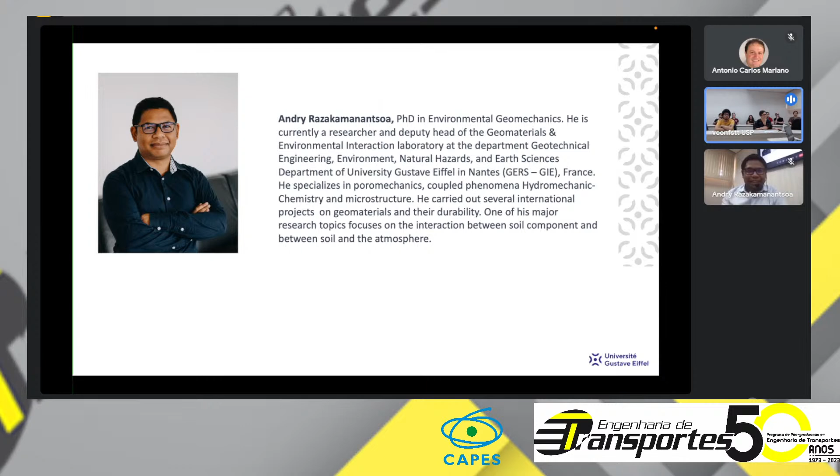Okay, the context is today we are aware about all questions related to global change, SDG goals, and so on. But in earthworks and in road infrastructure in general, the question remains focused on eco-friendly infrastructure from the implementation till the deconstruction, involving all the different steps. Also about the economy of resources, mainly water, because when we talk about global warming, it's a question of water, it's a question of renewable materials. And after, about the durability of a structure, and last but not least, which is very important, the health consideration around the earthwork application and the road in general. I mean, air quality.

When we talk about road infrastructure and so on, when we talk about soil, we talk about stabilization: how to stabilize the soil in order to have the recommended strength to support traffic and all the activities above. I understand during my stay here in Brazil that the way of designing a road in Brazil is a little bit different from the practice that we have in France.

So, considering the soil classification in France, which is not exactly the same as in Brazil, but I think that you know more or less the parameters that I present. In Europe, when we try to select a type of binder used for soil stabilization, we have to consider the climatic condition, which is arid, temperate, or semi-tropical, but most of the time we have a temperate climate, and wet or dry.

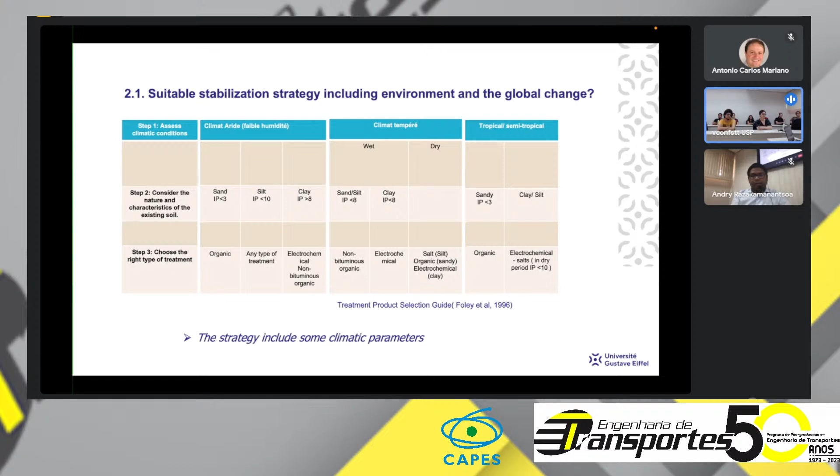So for that we use the plasticity index, and also to verify if you have organic matter or not inside the soil. Based on that, we try to select the product. This is a way of selecting the product which is recognized for soil stabilization, because now we have to consider the environmental aspects, I mean, how harmful the product is to the environment.

So, if you consider the different types of product that are available, I didn't put here lime and cement because they're conventional products, but for the rest, we have to consider these aspects. I mean, the volume of traffic: mainly when we talk about soil stabilization in Europe, we consider that we have low traffic, which is not the case here. We have intense traffic in Brazil, as I understand.

So we consider the materials, their plasticity, and the quantity of fines inside. I mean, we consider the clay activity of the soil, and after we involve the climate and traffic. So this is an example of soil classification involving the traffic.

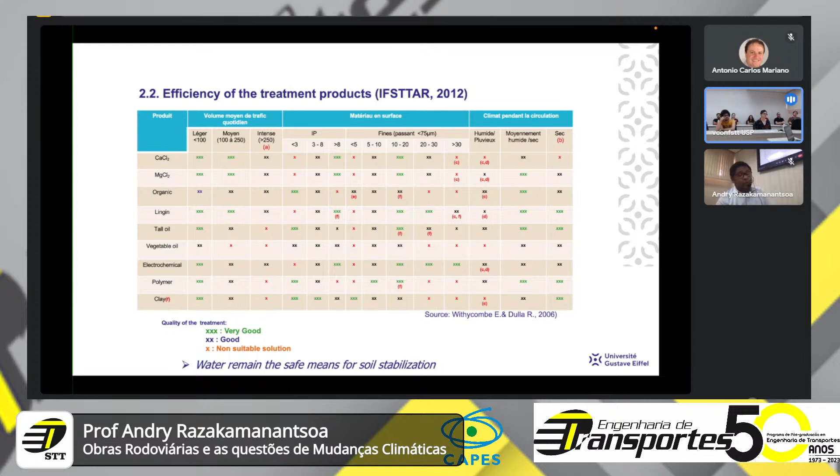But regarding all of those products, the least expensive is water, and we use water in quantity in earthwork construction. So in the following phases, I will talk mainly about the economy of water and its use in earthwork, and how to optimize the use of water in order to optimize also the strength, the implementation, and the trafficability on the road.

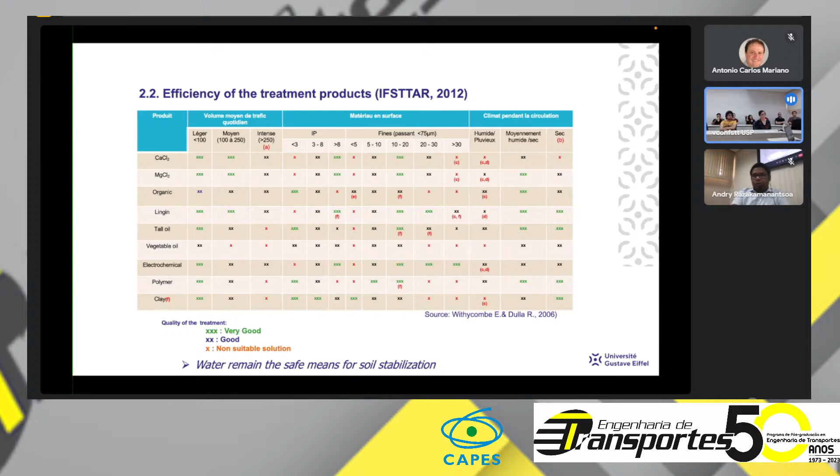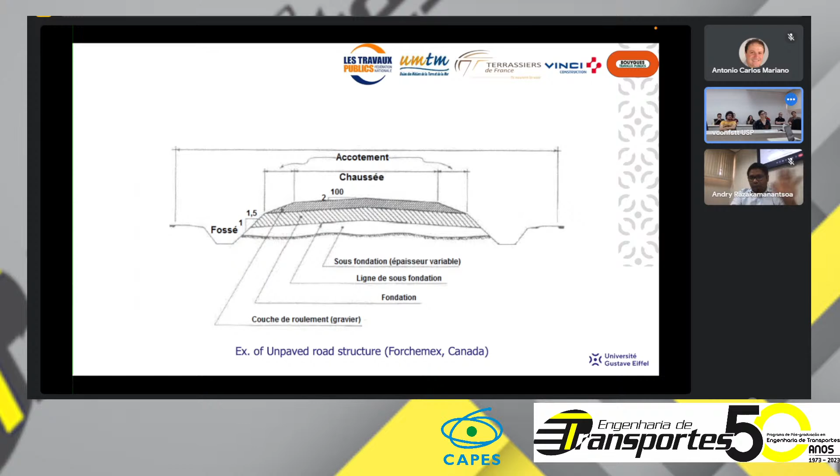Let's talk about the implementation. When you talk about implementation of a road or unpaved road, this is an example of a structure of an unpaved road. I go ahead. One parameter which is important is the compaction level. I don't know if you have a sheep foot roller in Brazil. I think no. This one. I think it's the same use as in Europe. We use a sheep foot compactor when we have a fine soil, a clayey soil, or a lateritic soil with a high quantity of fines.

And as you see, we are not able to reproduce this mechanism of compaction in the laboratory. Today, when we design roads, earthworks or earth structures, we base it on the mechanism of compaction which is well known, Proctor, and you do the calculation based on that. So today we consider that many things have been done in this way, but many disorders remain unexplained until now. For example, rutting: you are not able to understand it from a laboratory point of view, but we see it in reality, in real life.

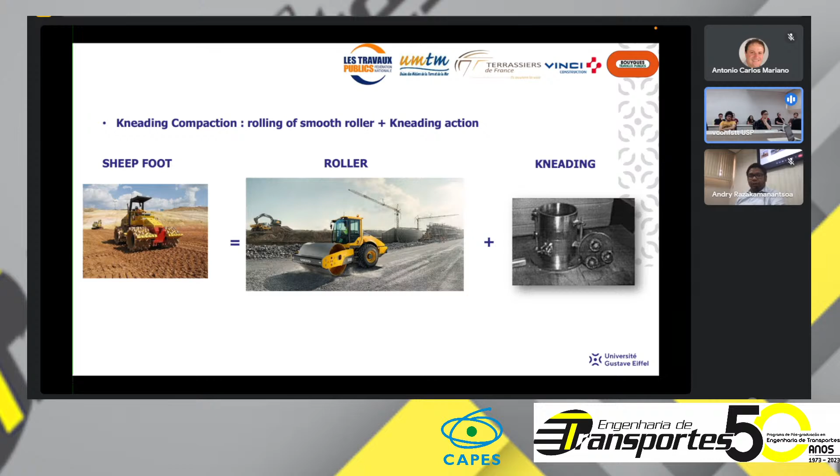So by considering climate change, resource saving and water saving, we tried to think and work to understand the mechanisms governed by the kneading in compaction. So when you consider the sheep foot compactor, what is this? It's a combination of roller compaction with kneading compaction, which are two complementary processes. Let's talk step by step about roller and kneading compaction.

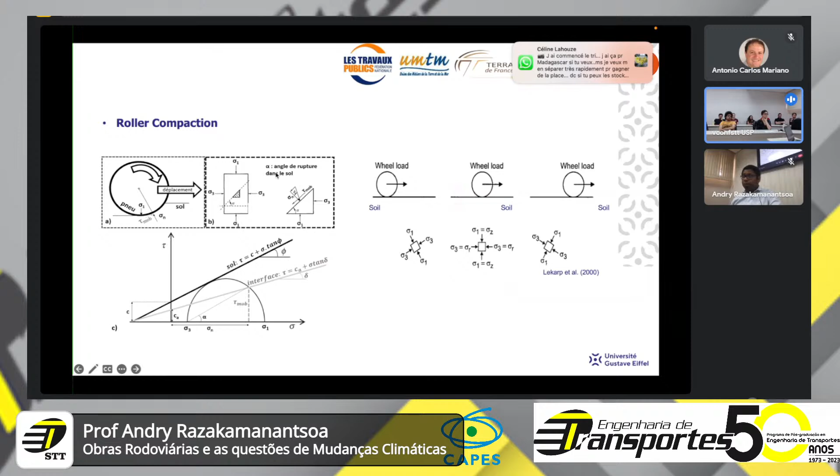When we talk about roller compaction, I won't go in deep, but just globally: during the rolling of a wheel, we have stress tensor rotation, and during the rotation of a wheel we have an additional stress tensor which enhances the soil compaction. This is the case of roller compaction. I won't talk about Terzaghi and so on. We can discuss it later if you need.

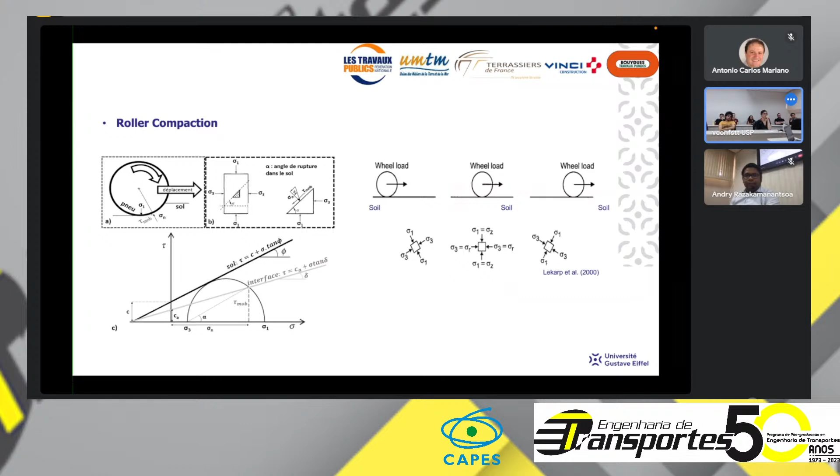So we tried to reproduce this way of compaction in the laboratory. For that, we used something that is used for asphalt. I don't know, maybe you have it here to compact asphalt. We compact the soil in the same way, with a detail about the level of compaction stress, which corresponds to the main current compactors used in the field, considering the scale effect.

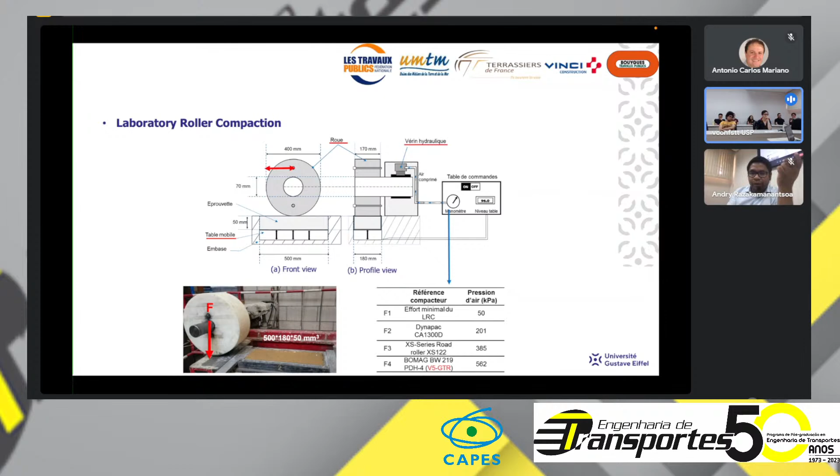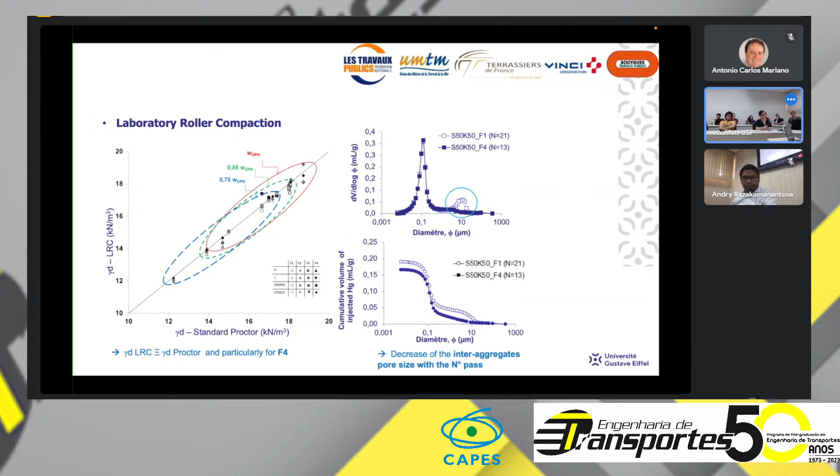It's just an observation and a kind of autopsy, not a quantification from now. The change due to compaction impacts the interaggregate pore, mainly for soil submitted to roller compaction. The next step is to consider the scale effect.

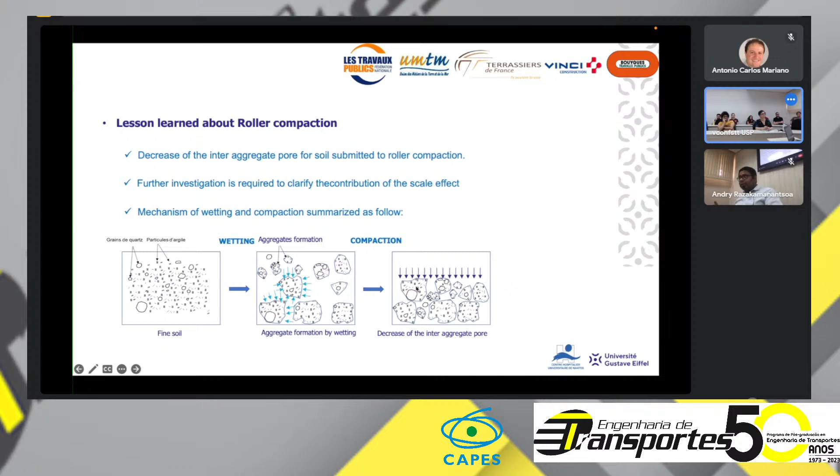I think that it's not significant, but it's necessary to have a rigorous approach. So the main important thing to keep in mind is that when you have a fine-grained soil, during wetting you create an aggregate, and during compaction you reduce just the space between aggregates, but you don't touch the size nor the shape of the aggregate. It's an important thing that we will implement after.

Let's talk now about kneading compaction. Kneading compaction is used mainly in France for lime or cement treated soil. So for that, we worked with a company, Lhoist, who produced the lime, and we did a lime treatment to see what is the gain by kneading compaction. This is the company's interest, but for us, the aim is to understand the mechanism of kneading action.

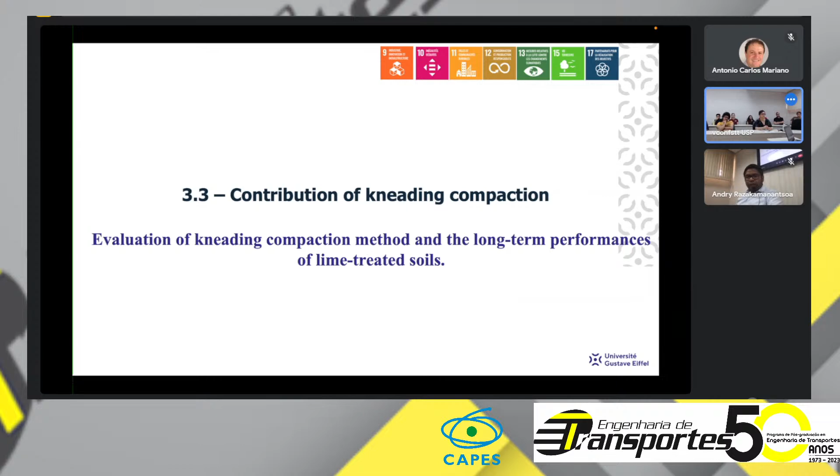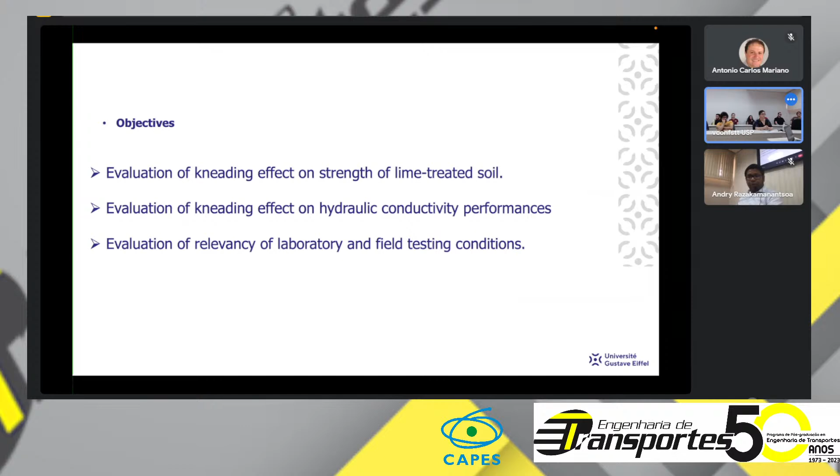For that, we have 3 points. The first point was to understand the kneading effect on the strength of lime-treated soil, then the hydraulic conductivity performance, in laboratory and field conditions. To investigate the permeability, we use a flexible wall permeameter, and we did UCS for mechanics and ICP to analyze the water which goes out.

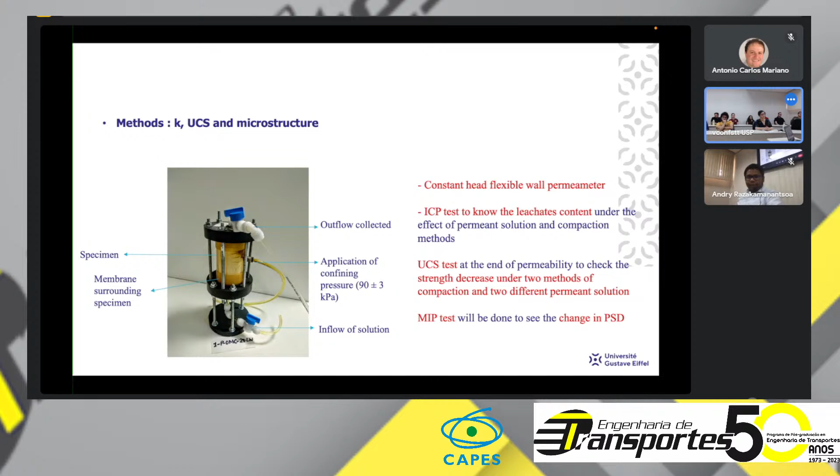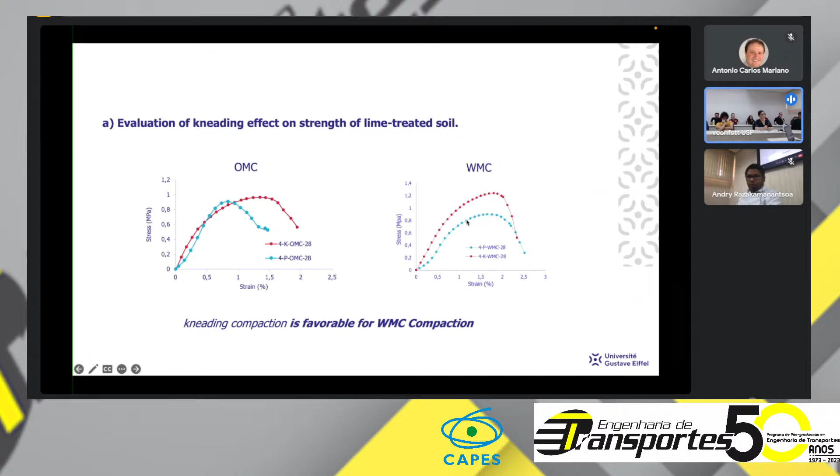What was read in the literature is that when we use kneading compaction, we can compact the soil in the wet side of Proctor. We verified it with the example that we have here. By Proctor, we get 0.8 megapascal. By kneading compaction, we have more than 1.2. So we verified what was shown in literature.

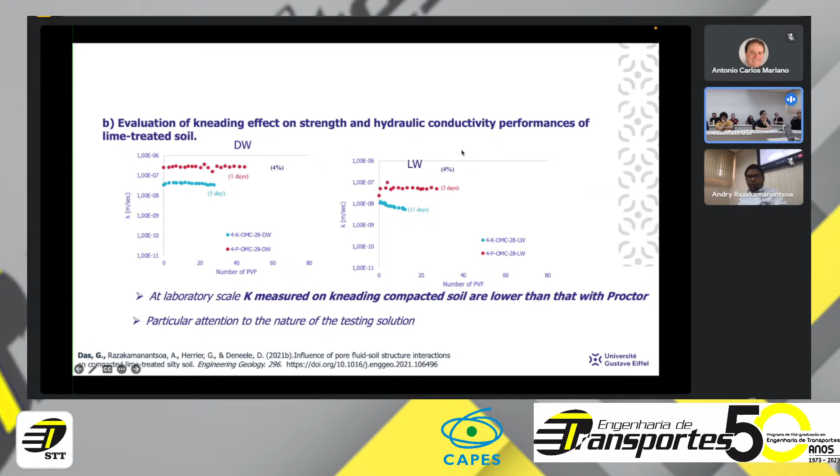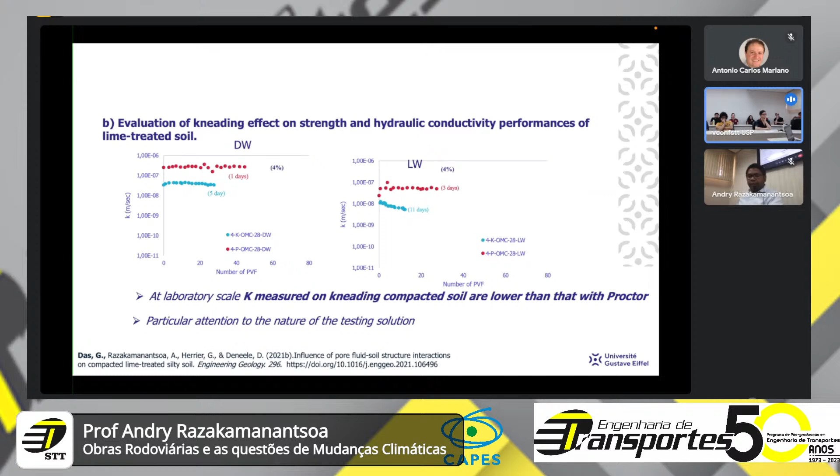Also for permeability, you get the same things. One important thing to consider is that when we do compaction of soil, we have to take care about the nature of the testing solution. That means we have to use a solution, water or another thing, which is very close to the condition that we'll get in field, because we have a different leaching mechanism between the materials.

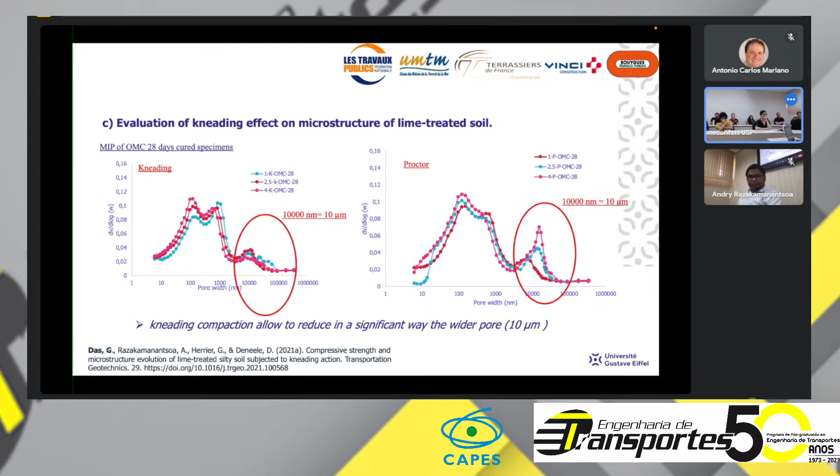In terms of pore size distribution, we see the difference. Kneading compaction reduces the pore in different levels, the intensity and the size, which is not the case for Proctor, mainly the wider pore.

So now we understand more, we have more information about rolling and kneading compaction. Now the sheepsfoot compaction is a combination of rolling and kneading. So let's talk about road traffic.

We apply a number of cycles of traffic, and what we find is that during a certain number of traffic cycles, we break up the aggregate that we formed after wetting. And the more we go in terms of number of traffic cycles, we degrade the aggregate till the initial state of soil. This is a mechanism of dust production in unpaved roads in general.

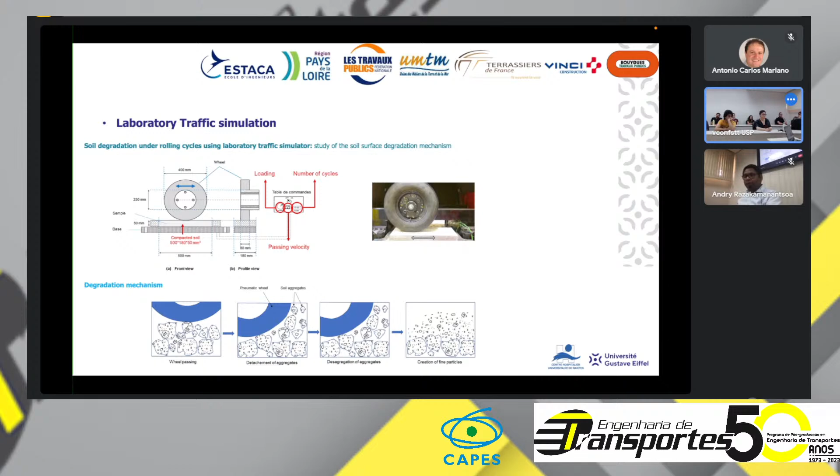This test was shown with smooth tire, but we have done exactly the similar thing with different sculpture of wheel. So now we have particles on the surface of soil. These particles are able to go into the air and form a cloud of dust.

From now, the question is how to reduce dust production through compaction. This is an interesting economy in the field, because you reduce the quantity of water, and you also reduce the number of maintenance operations.

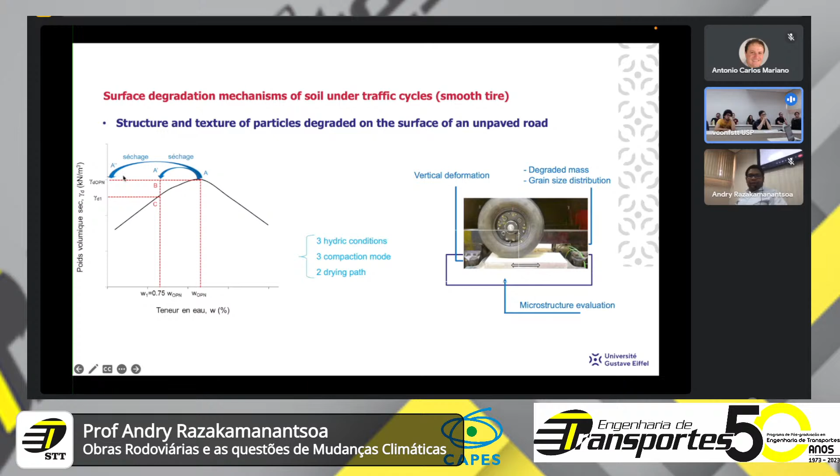So we tried to test different configurations of compaction and wetting of the soil—A, B, C, and drying. The idea is to find, in an unpaved road, which configuration is better.

Is it necessary to compact at optimum? That's not the case for unpaved roads, because we have direct rutting. Is it necessary to compact on the wet side? That's also not the case, because the wheel will sink in, so we don't have sufficient bearing capacity.

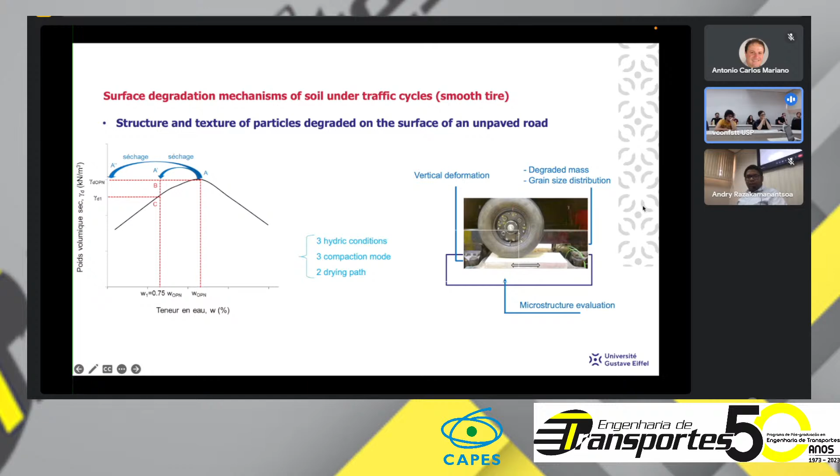So the idea is to test at this point, but the question is whether it's necessary to compact directly in a dry state until optimum Proctor, or to compact at Proctor and then dry it. We have different drying paths, which are interesting to investigate in terms of unsaturated soil mechanics. But what we did was try to make a traffic test above it.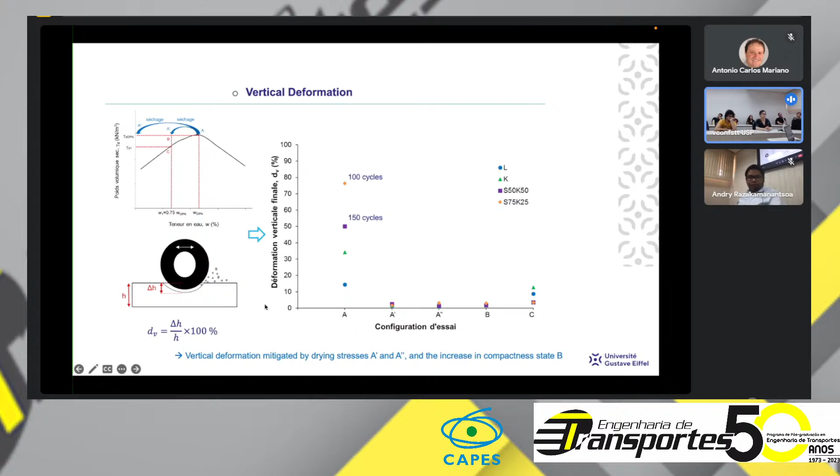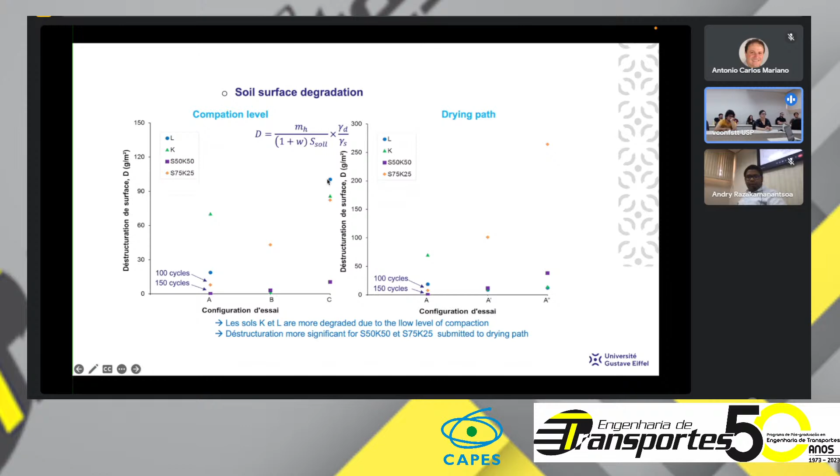The result: what we did is measure the vertical deformation against the number of cycles. Then we built a parameter which is the surface degradation, and with this parameter we are able to compare different drying and wetting paths.

Each of these grain parameters, we also use the grain size distribution of particles collected from the surface, in order to assess the evolution of grain size distribution of particles. We combine these two parameters to assess the degradability of the soil.

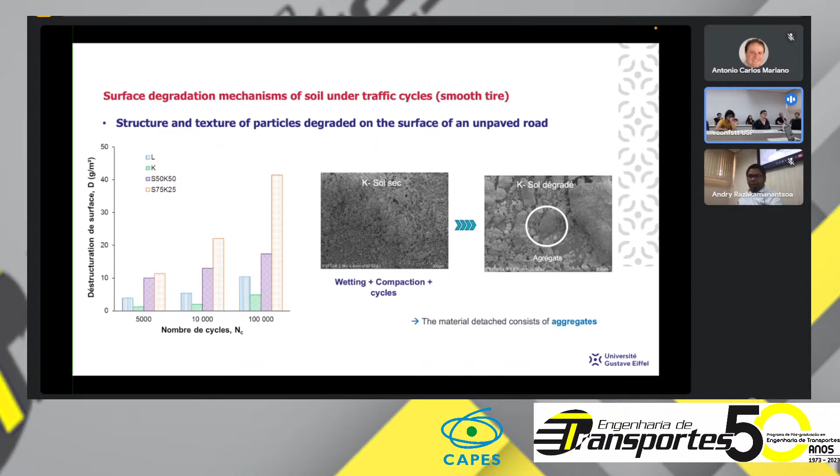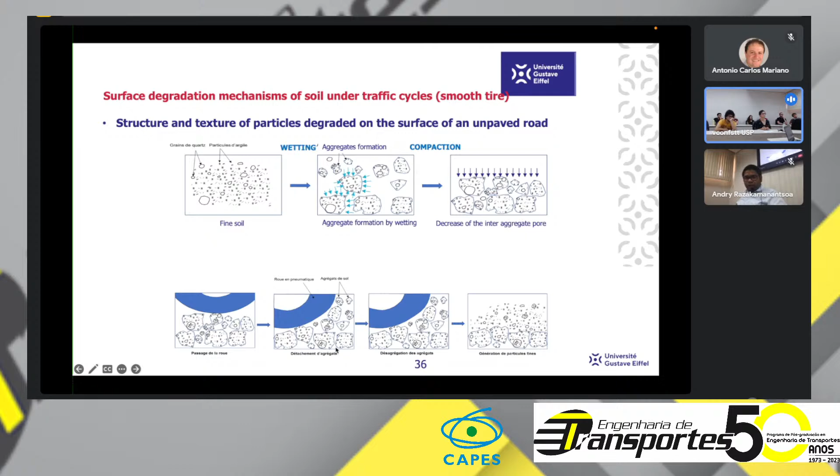By means of that, we get the main mechanism of aggregate formation and degradation, surface degradation.

With all this information, we worked with the National Federation of Earthworks in France to help them have a guide for earthworks applications. In France, earthworks is one of the main activities using huge quantities of water, and their goal was to reduce water use by 50% in their daily activities.

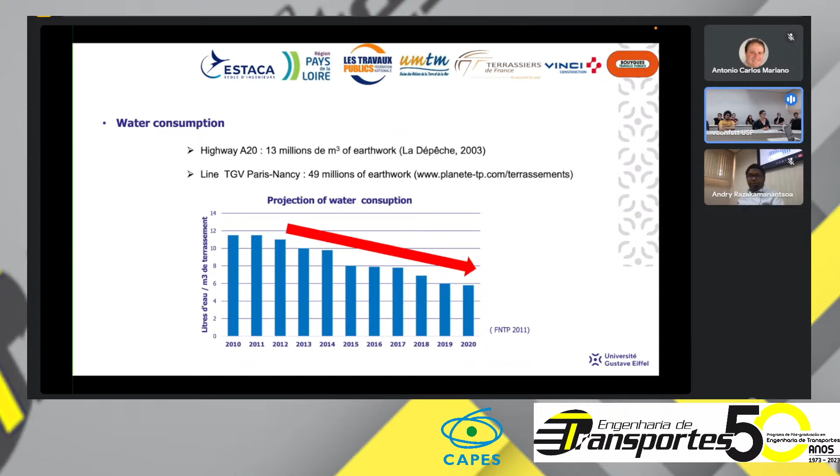But the problem is they were not able to estimate the quantity, so we approached it differently. We wrote a guide for all the Federation of Earthworks companies in France, using the soil classification in France.

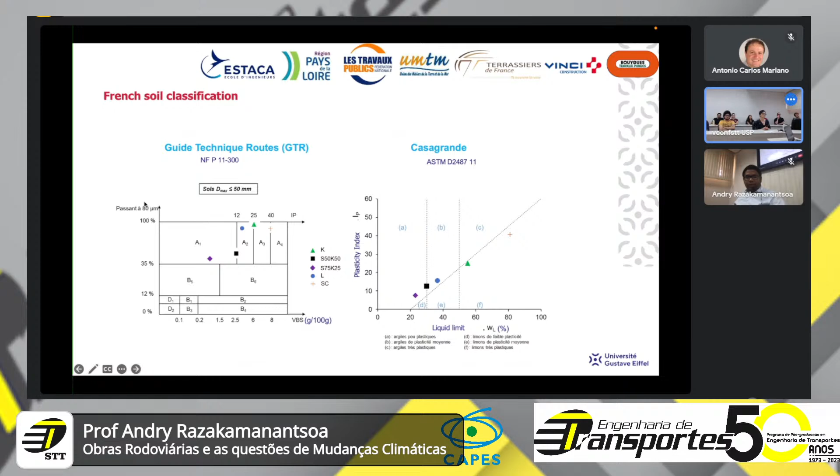In this table, the soil classification is rapidly a combination of grain size distribution, methylene blue value, and plasticity index. With these three parameters, you can classify the soil according to its quality.

Mainly, the soil which can be subjected to dust emission is A soil. In the new soil classification, it becomes F soil—so from silt to clay, highly clay.

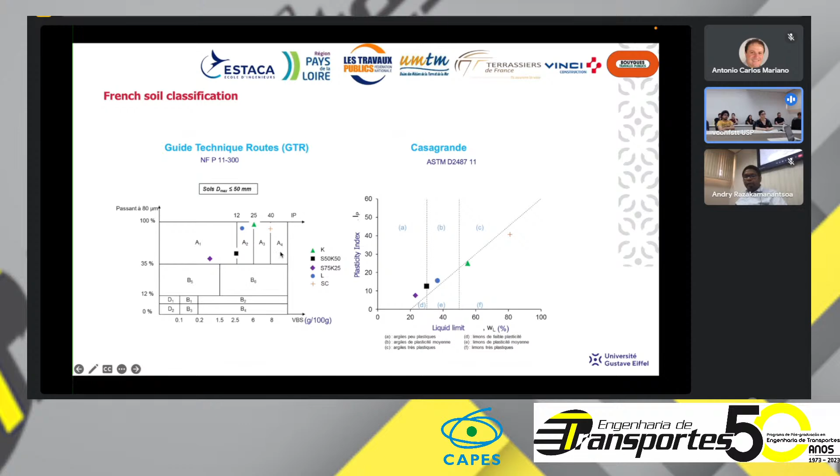So this is the guide. It is composed of four steps. First, we identify the source of dust emission. Second, we analyze the soil properties and the device used in the quarry or earthwork field. After that, we analyze the immediate environment on the site, and give recommendations.

The first step is about identification of dust emission—mainly, how to say, the nuisance it causes.

The impact of dust emission is firstly a decrease of visibility in the field. Second, the leaves of vegetation become covered with dust, and plant activity is also reduced. After that, it enhances pollution of natural spaces.

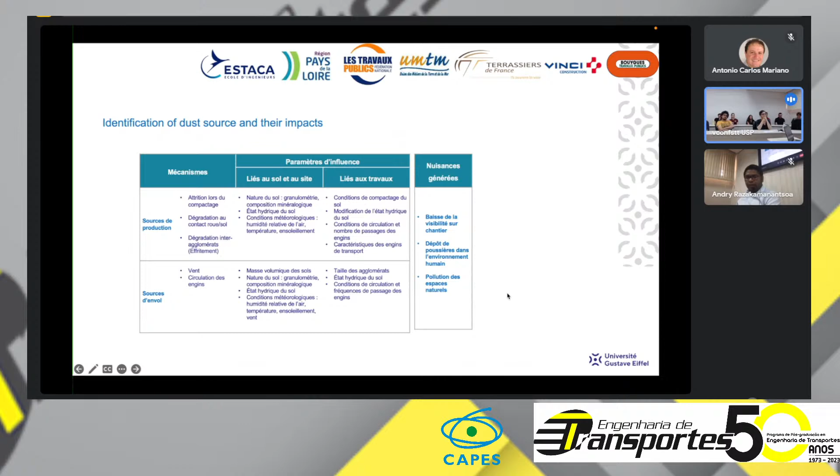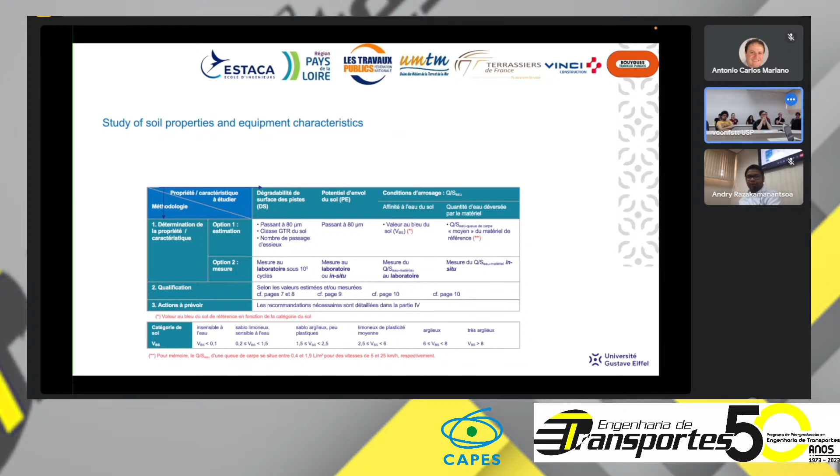Based on the soil classification in France, mainly the methylene blue values, we can consider different types of soil. Based on these different types of soil, we can adjust the quantity of water required, as a provided requirement.

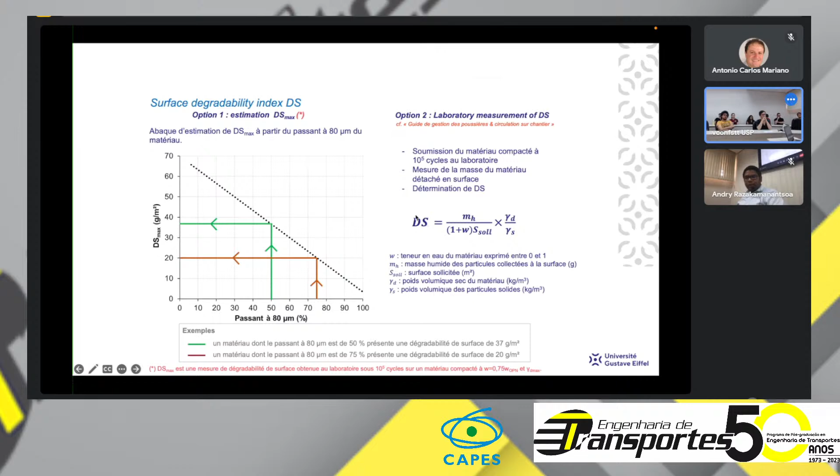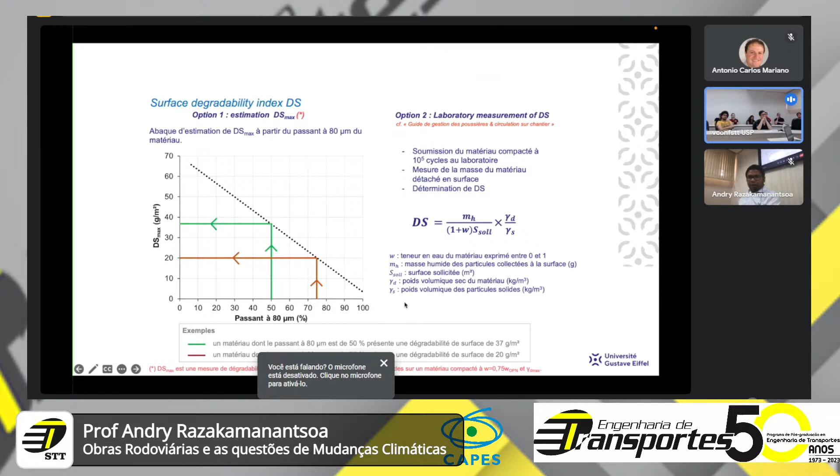For that, we use the surface degradability parameter we developed previously, and combine it with the fine fraction. Based on this combination, we can determine exactly which quantity of water is needed for the activity.

After that, we can also classify the soil according to the level of degradability, considering the actual number which will be applied in the traffic.

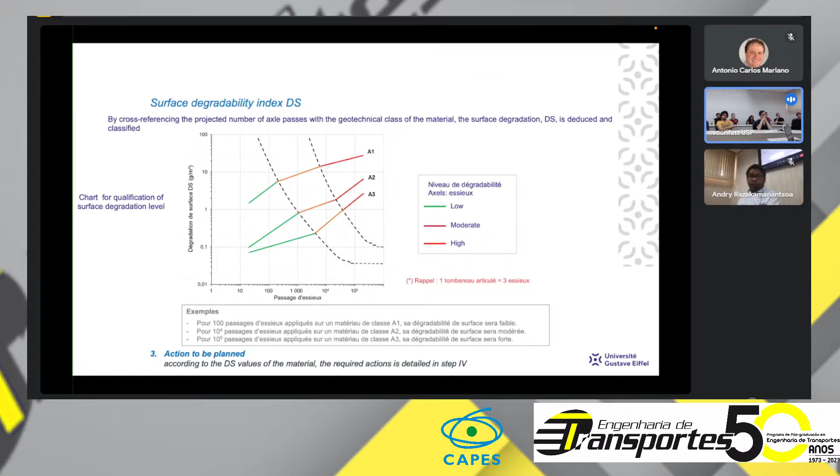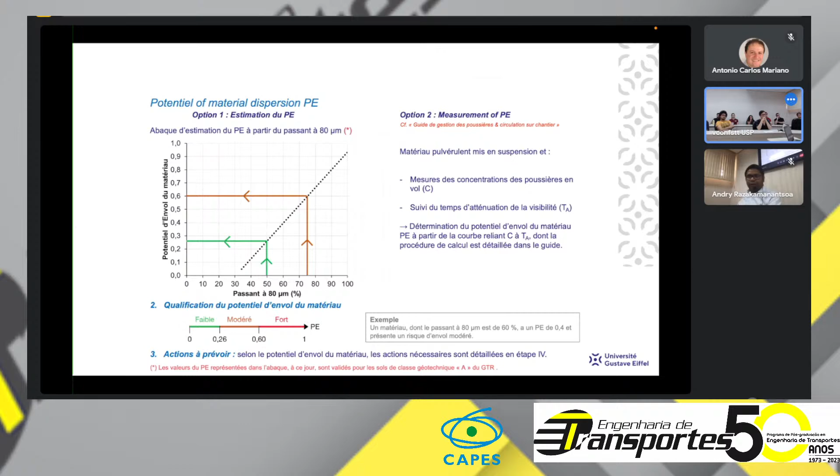And last but not least, we tried to assess the ability of a material to produce fine particles before we go into the field. We have an idea about the quantity, the potential emission of materials. I will show you how to do this, and then discuss environmental recommendations.

These are the main recommendations, the different steps of good practice provided by the university to the Federation of Earthwork in France, who use this guide to adjust their use of water. This is the first action: water saving.

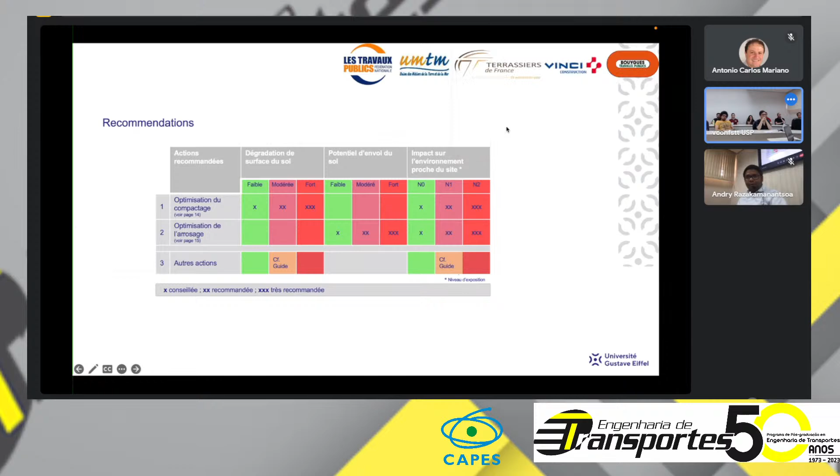Next, how to optimize the quantity of water if we know we have a soil with a potential for dust emission. For that, based on the device or machine they have in the field, we create a chart linking the quantity of water and the speed or velocity of the vehicle during traffic.

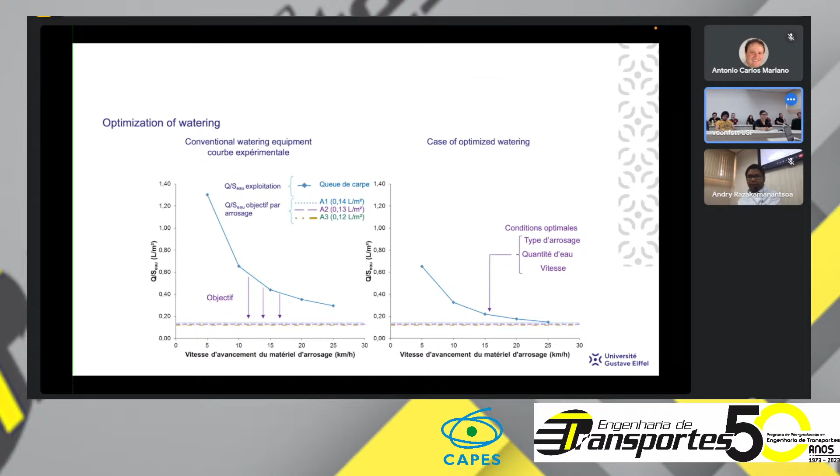Let's talk now about the potential of dust emission. This is a patented device developed to assess the impact of decreased visibility due to dust emission. It's very simple: we send high velocity, compressed air, and create clouds of particles.

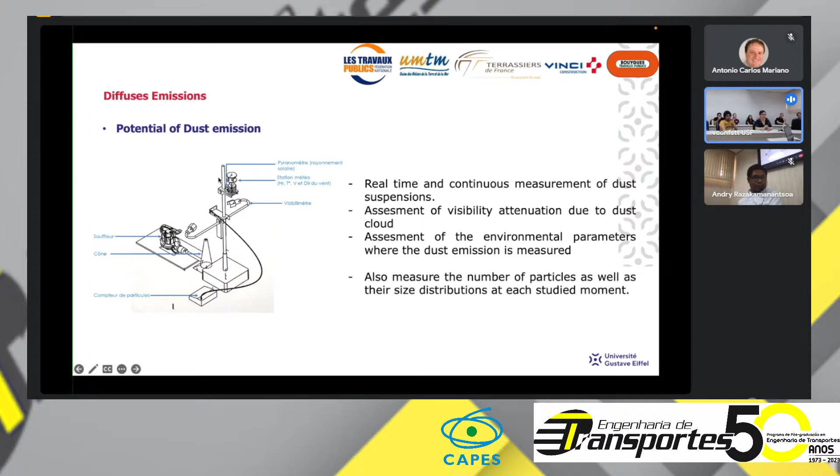We can use sand, sugar, or another powder, but the aim is to produce fine particle clouds. We count the particles with particle counters, and at the same time measure the environment: relative humidity, temperature, and sunlight.

This is the theoretical aspect, but I won't go into detail. We have a parameter called potentiel d'envol, which is the tangent of theta. Theta is this angle, which relates to the exposure duration and the concentration of particle matter collected, divided by relative humidity.

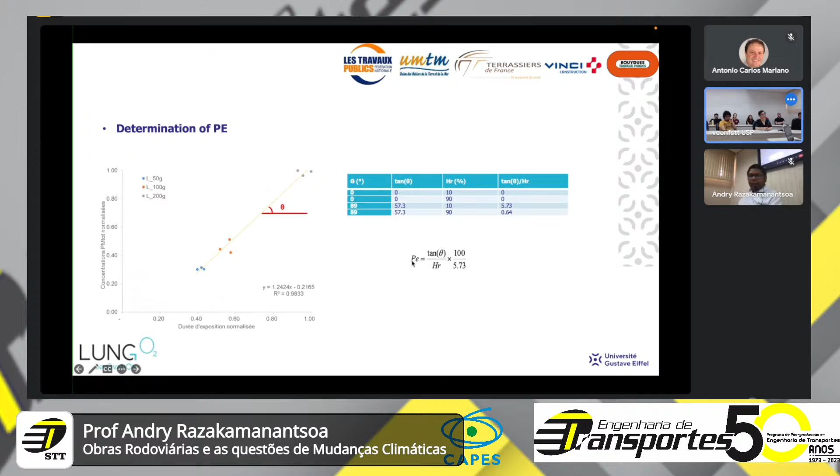Each soil's particles have an intrinsic parameter, different for each soil. So we can use that to classify soils by their ability to produce fine particles.

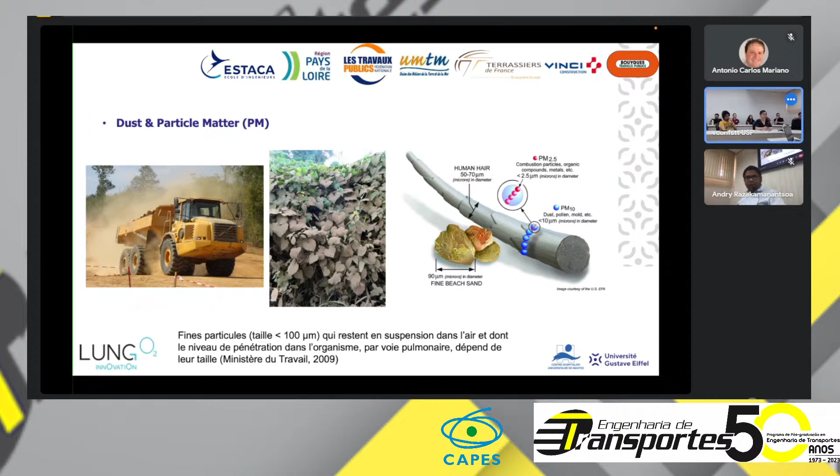Now, how about dust particle emission? If you remember, we now have particles on the surface. What are the sufficient conditions for these particles to become dust, as you can see here?

Just for your information, when we talk about particle matter, we talk about fine particles, involving sizes from 0.1 to 100 micrometers. To give an idea, 100 micrometers corresponds to a human hair, and 0.1 micrometers is something we cannot see with our eyes.

But if you take into account health exposure, the smaller the particle size, the deeper the particle goes into our lungs, generating cancer and other diseases.

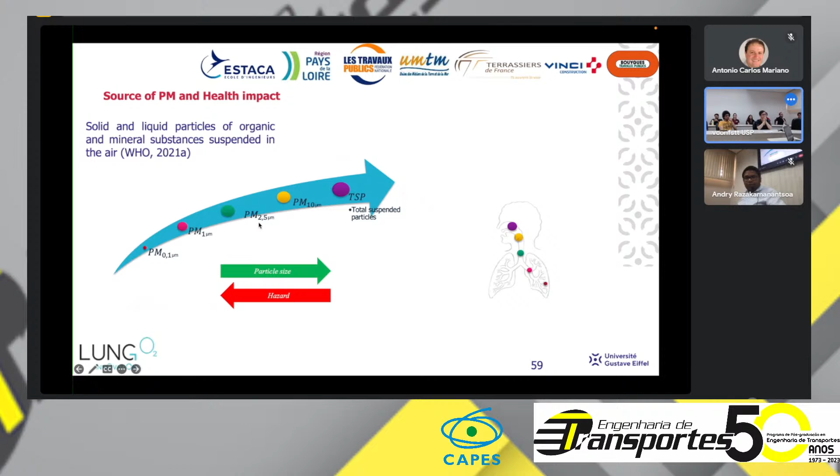So mainly we focus on 2.5 micrometers. And now we will talk about aerodynamic particles, not the size of the particle.

What is an aerodynamic particle? It's just an equivalent particle. This is a particle whose shape we cannot describe, so we take an equivalent diameter which has a density of 1 gram per centimeter cube.

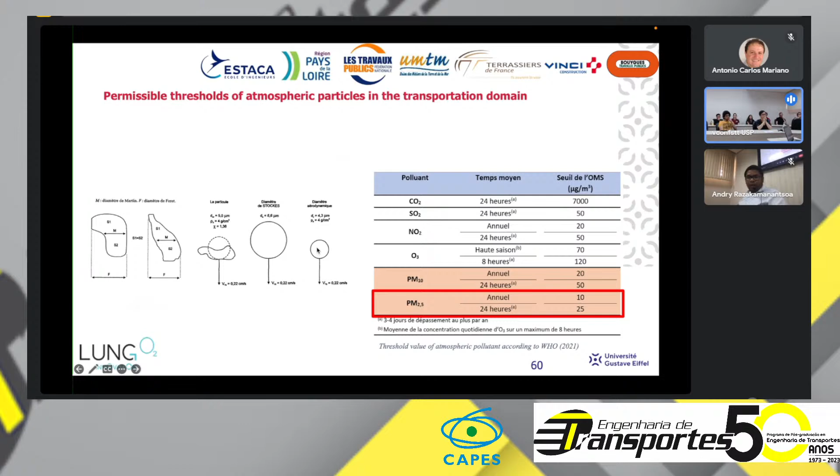To highlight the mechanism of soil dust emission, we apply cycles of traffic on different types of soil, and we test in a wind tunnel to analyze the boundary limit required to take off particles.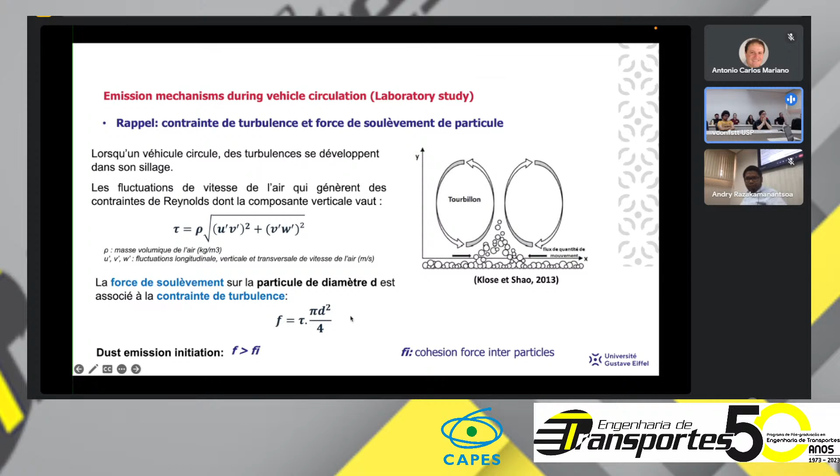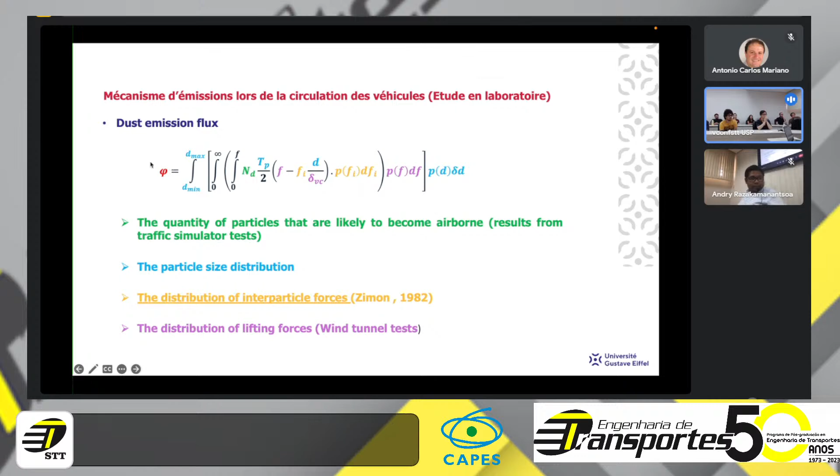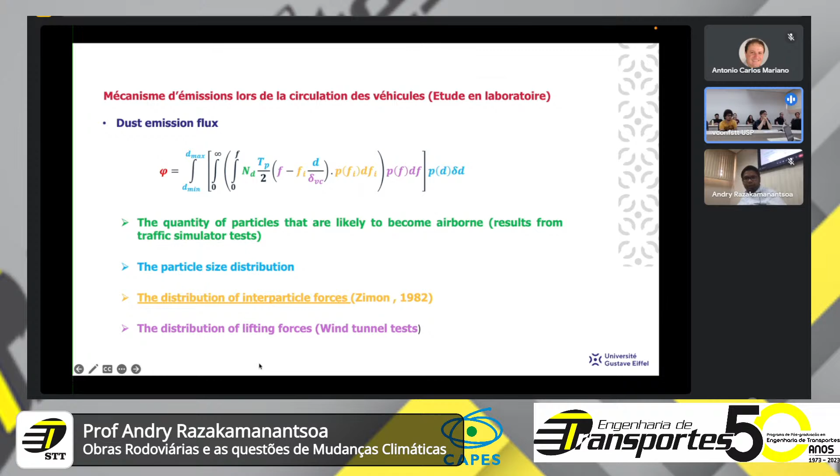For that, we propose a dust emission flux. This flux involves all these parameters, which we determined point by point through different types of experiments. What are the lessons we learned?

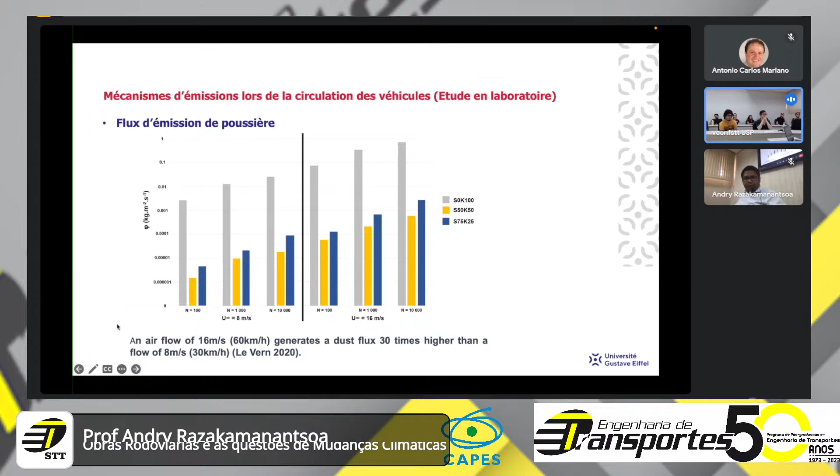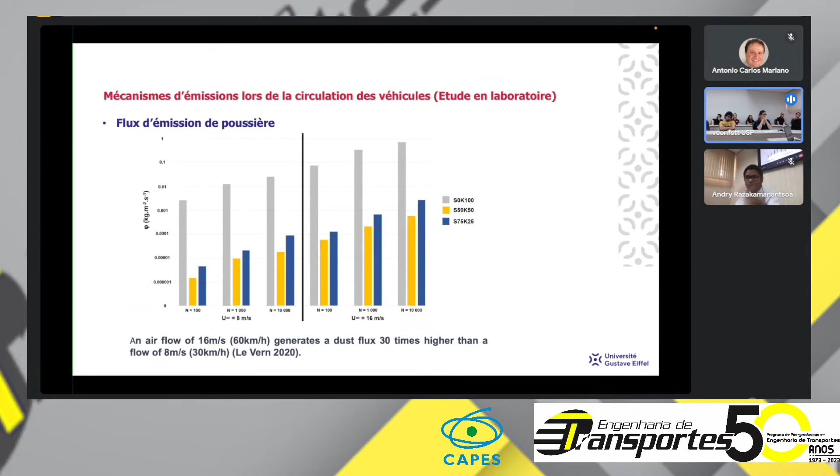This was verified in the laboratory in a wind tunnel, but also verified in the field by measurement. So we did measurements in the field by means of this track test, which maybe you also know.

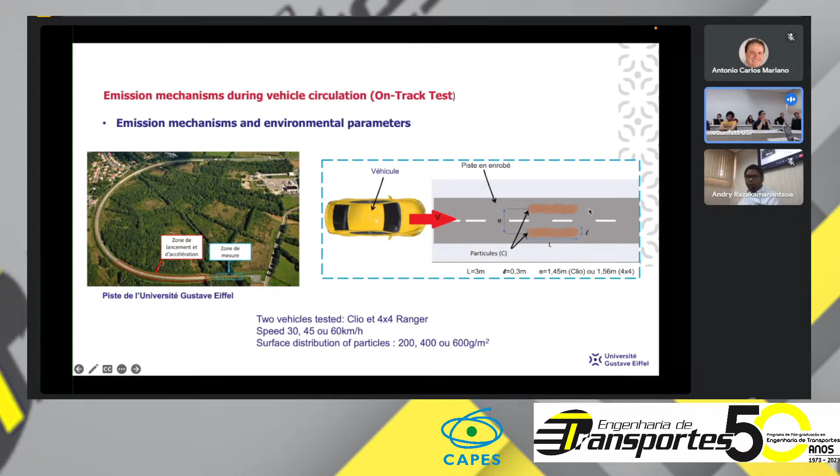The idea is to put dust particles on the road, drive a vehicle over them, count the particles, and measure the cloud produced. We record all the parameters linked to the momentum generated by the car during the test. We used a Ranger, Ford, and Clio vehicle.

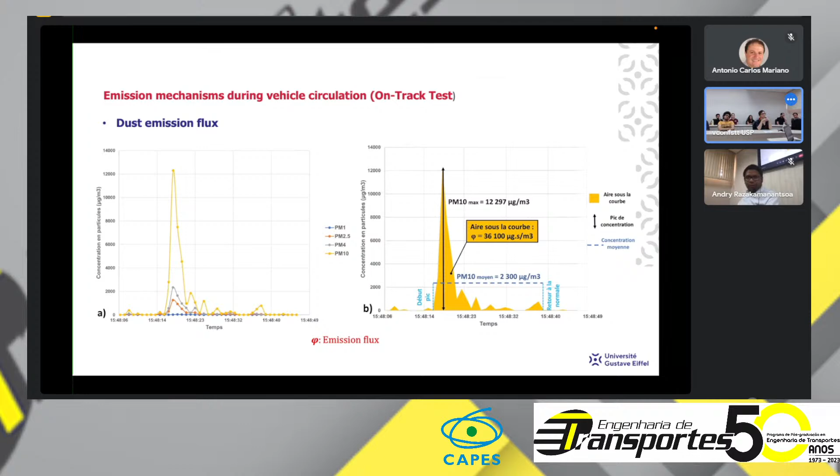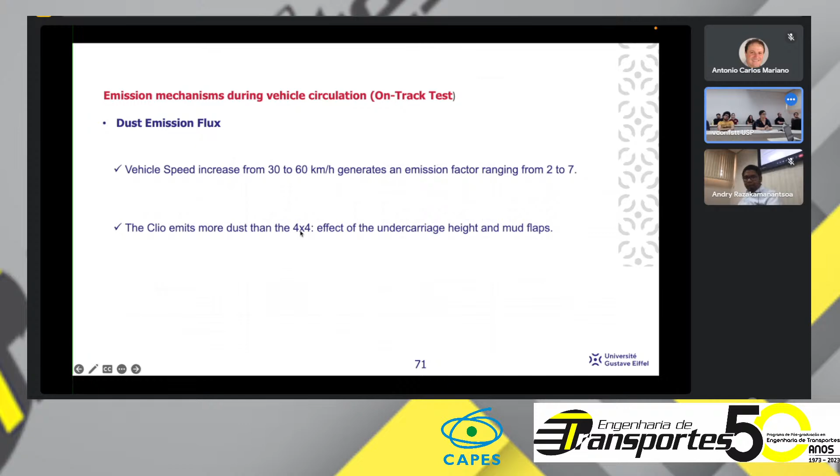Lesson that we have learned: from 30 to 60 kilometers per hour, the emission factor goes from 2 to 7, and the Clio emits more dust than the 4x4. This can be explained in the following work.

About dust diffusion, we did complementary tests in the field to understand more about exposure risk based on means of mobility. The idea is to test if the low-cost sensor to count the dust particles that we have used for our test can be distributed in a space in order to have clear information about the exposure to dust emission in the city, for example, or in a quarry, or in earthwork fields.

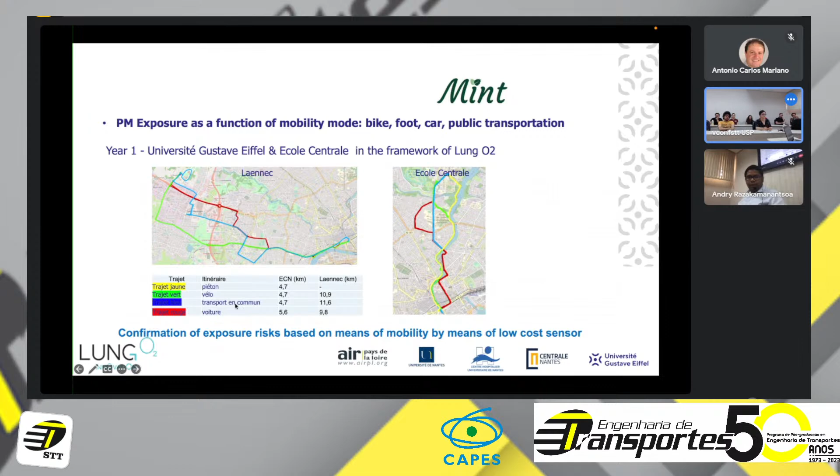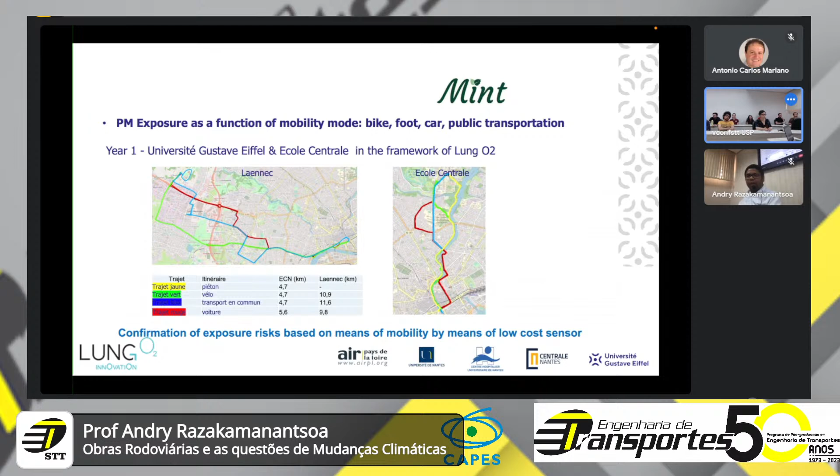We did that with different means of transportation: foot, bike, car, and public transportation. And we compared with the official database of air quality, and it gives a similar level. The next step was to put a sensor on different students with different means of transport again, and the second step was to go to different places where we consider that we have less exposure. For example, close to a forest or close to a river or in the city center.

This is, for example, the case of Nantes, where all the road is in red. Red means that we are above acceptable values of exposure. And this is another way, which is in the city center also, but where we get a high quantity of particles,

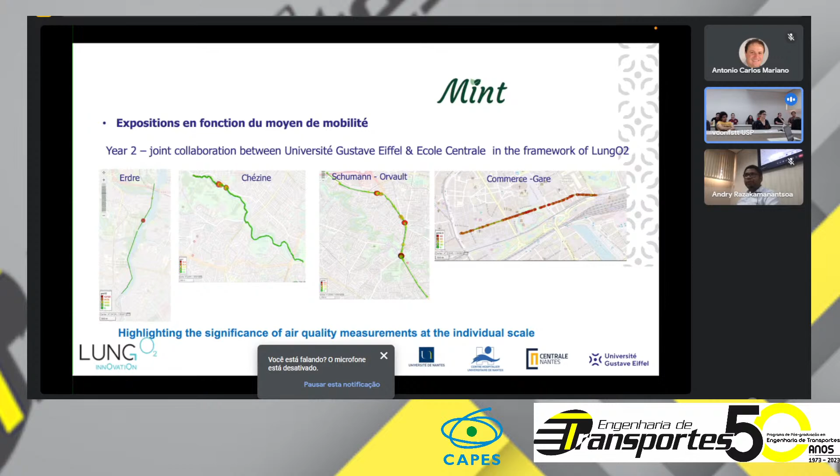So, I mean, all activities which generate energy also produce fine particles. So, that was our experience until now, but how to adapt, how to consider climate change, and how to consider also the environment in the activities of earthworks in France. And to go ahead, we have finally the main questions that we have to raise on the question of dust emission, which is that today

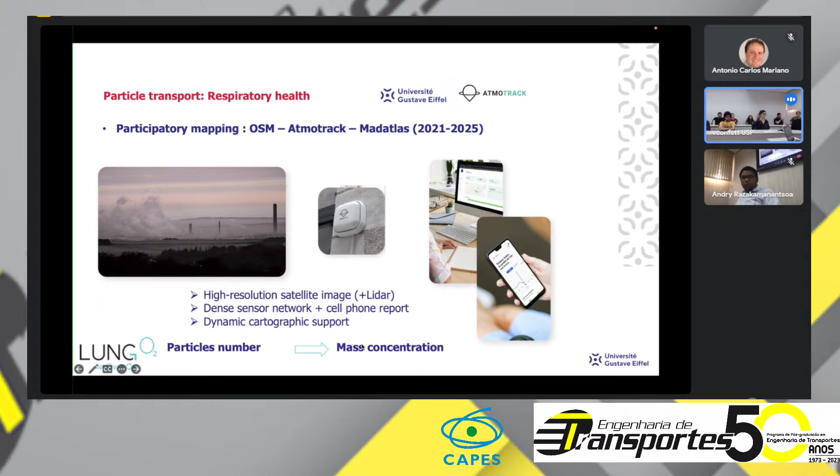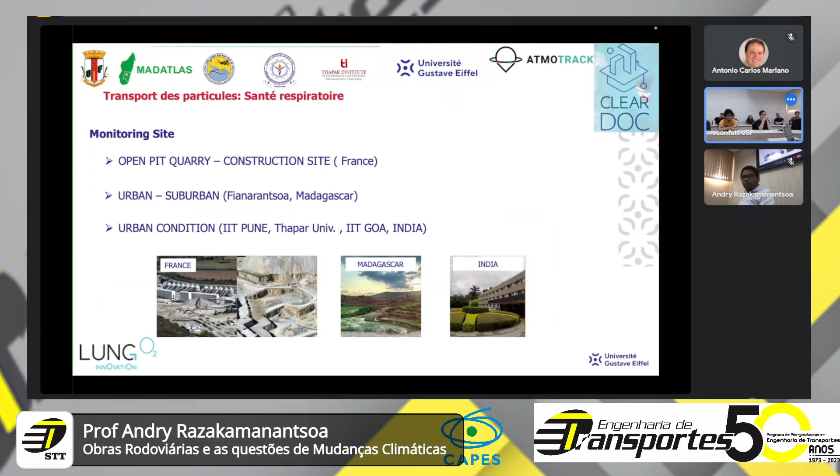To deal with that, what we try to do is to go to different places in the world and different activities in the world. For example, in France, we'll place different sensors in a quarry, in earthwork sites, and in different countries in the world to put sensors in urban and rural conditions, where we have a high difference in air quality. It can be here also. And the idea is to have an overall distribution of air quality and to compare with the main reference, which is given by satellite.

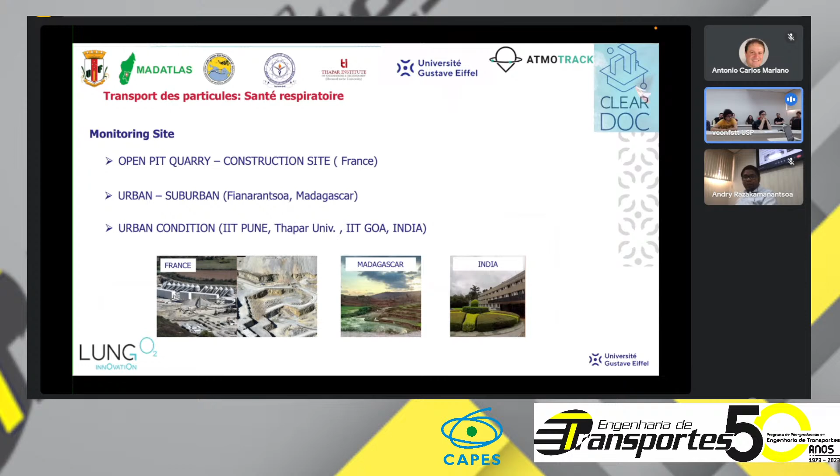So the idea is to combine these two ways of data collecting by using artificial intelligence to analyze the data set, because it's a huge amount of data that we can get. So the next step is to develop a low-cost sensor to assess air quality in open data, to provide everyone the ability to analyze their own air quality, to concentrate the effort on the conversion from particle count to mass concentration, and to take into consideration the relative humidity and temperature, and the difference in atmospheric pressure in all sets that we measure, because this has an impact on the particle emission.

And the last one is that this is a question of health exposure. The idea is to follow the particles from soil to our lungs by considering the pathogen agents which can be stuck on the fine particles and go until our lungs. This is a project that is ongoing with the CHU of Nantes and a group of researchers in INSERM and other health research centers in France now.